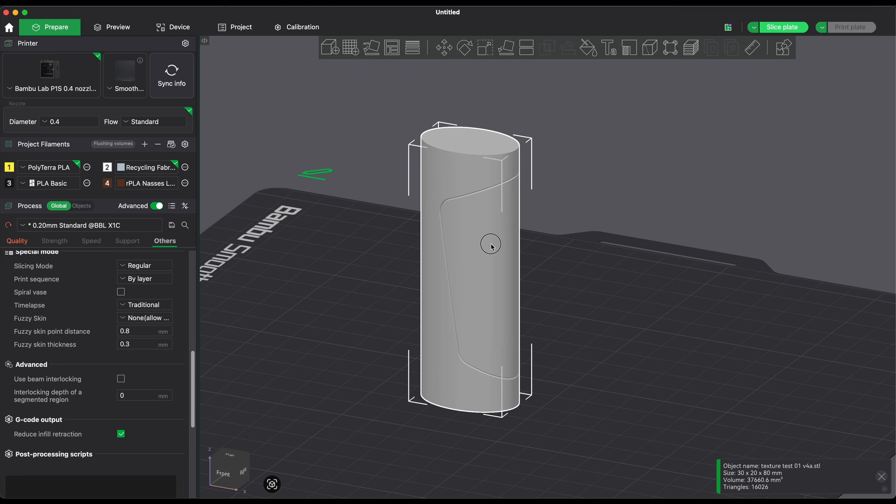So if you ever wanted to put a texture on a section of an STL file here, then you probably know you can use fuzzy skin, and especially fuzzy skin painting. Just select the part, select the tool, select fill, and you might need to wiggle around with the smart fill angle, but in this case it's fairly easy. And just select that. If you made a mistake, there's erase all painting, and you can change the settings and try again. And just hit slice.

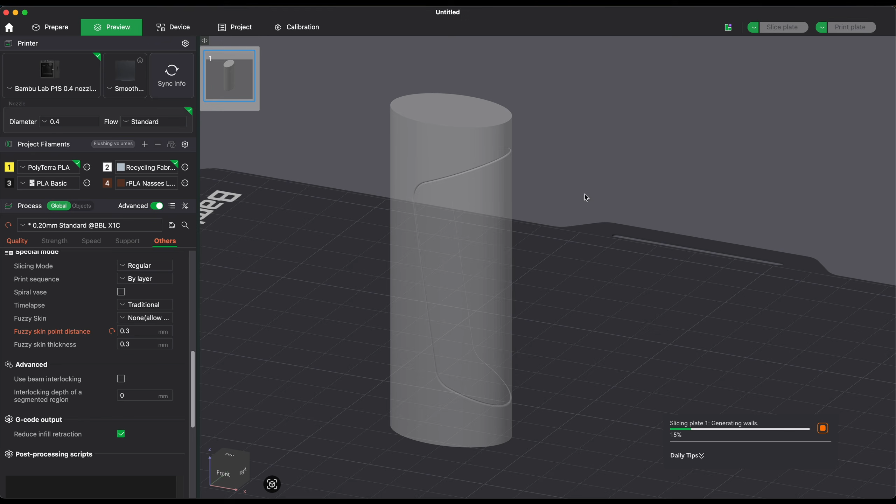And if that's too rough for you, you can change the settings here under the Others tab. Fuzzy skin point distance, maybe set that to 0.3 also. Slice again. And that looks much better.

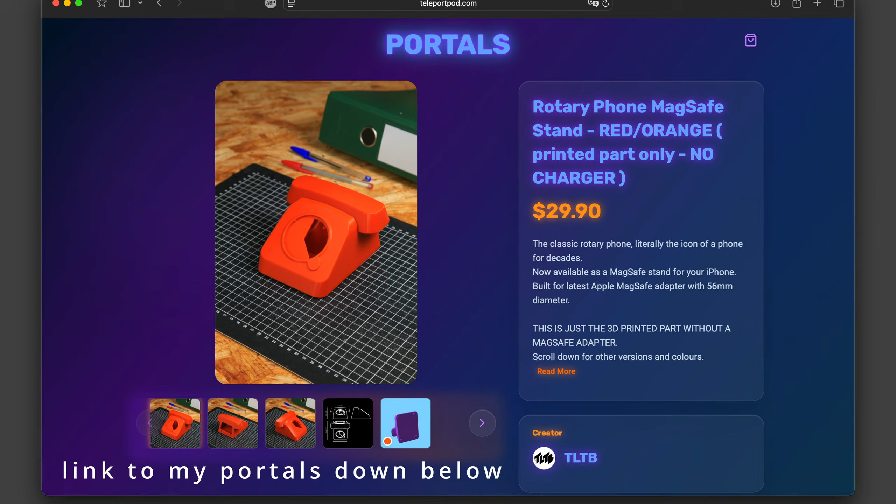But what if you wanted to actually bake this texture into the STL file to make sure it would get printed like this every time? If you want to share it, upload it to Cults3D, or actually maybe have it printed via portals. So let me show you a quick hack how to do that with Fusion and Blender.

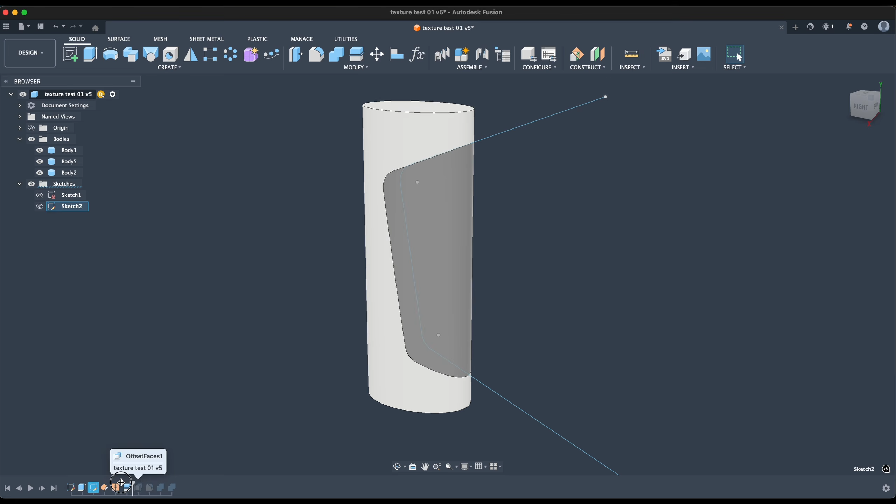So here's that test piece. Let me show you what I did here. It's fairly easy. I started with an ellipse that I extruded, and then I split this in two bodies with this line. And before I did this, actually, I took an offset surface of this part. So you just select all the surfaces, and this is like 0.5 millimeter inset, and you hit OK.

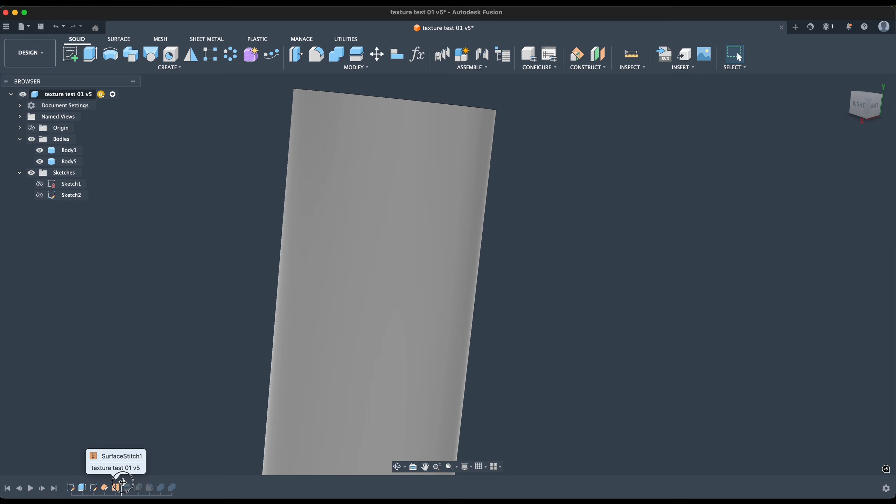To turn this into a body, you use the surface stitch feature, and you select that second body you can see in here in blue, and this will create a new body. And you can see here, there's the outer one and the inner one. We're only splitting the outer one, so we're left with this step.

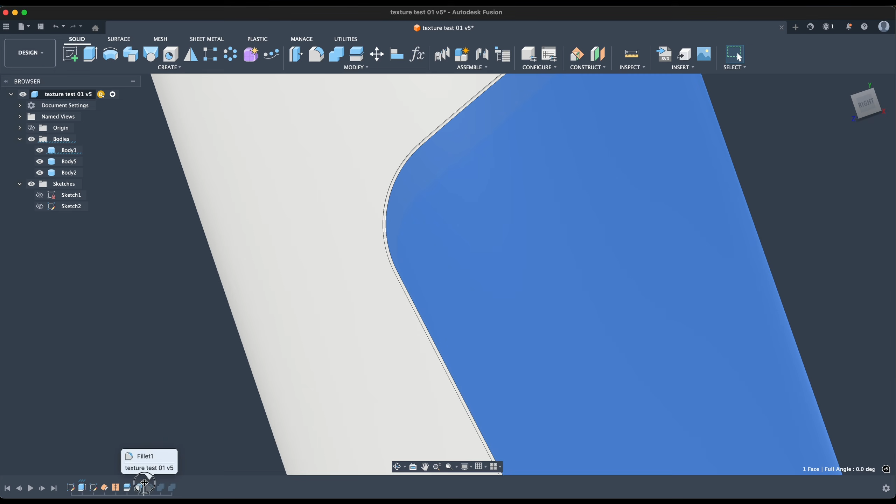I will also add a little gap here of, I think it's 0.15 exactly, because when we add the texture to this part, the texture will grow, of course, and to have a nicer separation between the two, that's why I put this gap here. You can play around with these values as you want. Kind of depends on your scenario also.

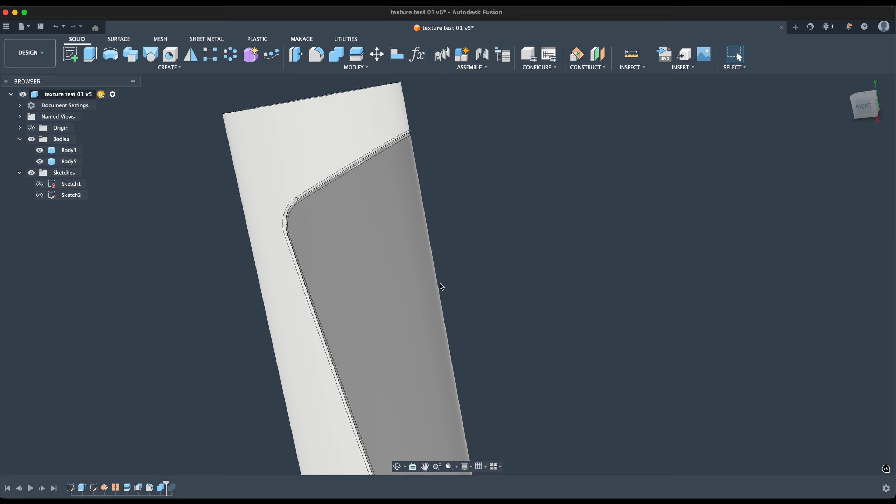And I put a little radius on here, and I merged the two bodies here into one, and we have the other body here, and that creates a nice overlap because we're going to merge them back together later. And if we don't have a fairly good overlap here, that's going to be tricky, and it's going to make the print take much longer, because then it'll print details on the inside that we don't even want.

So exporting this as an STL, I would recommend using the right-click menu here on a body, save as mesh, because then you also have the control settings. So we'll export that as the grip, and we'll right-click here, save as mesh. Refinement settings are set to high, that's good. And we'll call this main body. And that's basically it in Fusion. Let's jump into Blender.

So welcome to Blender. I'm using version 4.5.1 LTS. And the first step we're going to do here is hit A and delete all these standard components that we don't need. Then we'll drag in the main body and the grip at the same time. And we have to pay attention to the forward and up axis. In Fusion, X is forward and Y is up. And we'll import that. And ooh, it's kind of in your face, but that's not a problem.

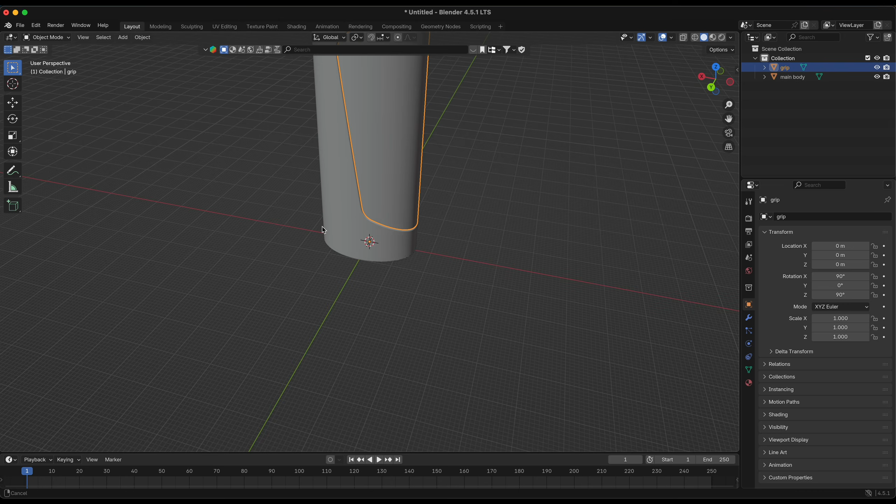Okay, here we go. We'll select the grip and apply a modifier, and that will be the remesh as the first step. I'd advise a 0.2 voxel size here, otherwise the file size gets really big. Of course, the lower this number, the higher the resolution, and also the bigger the file size.

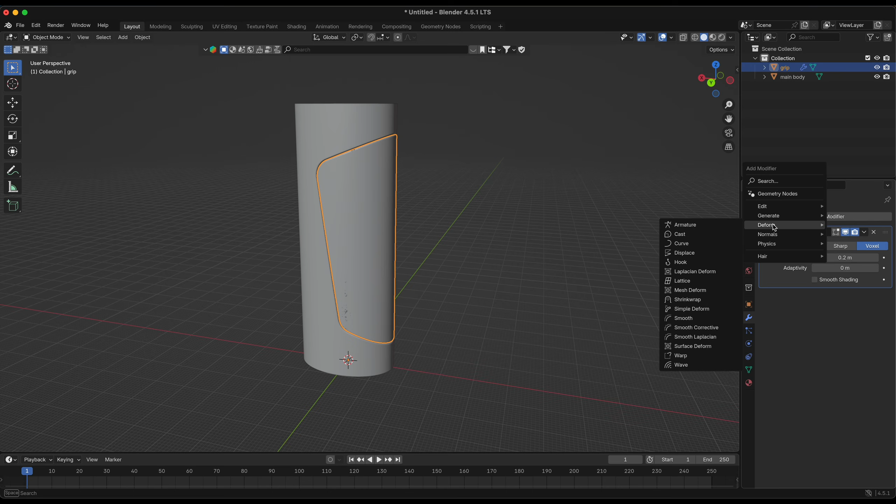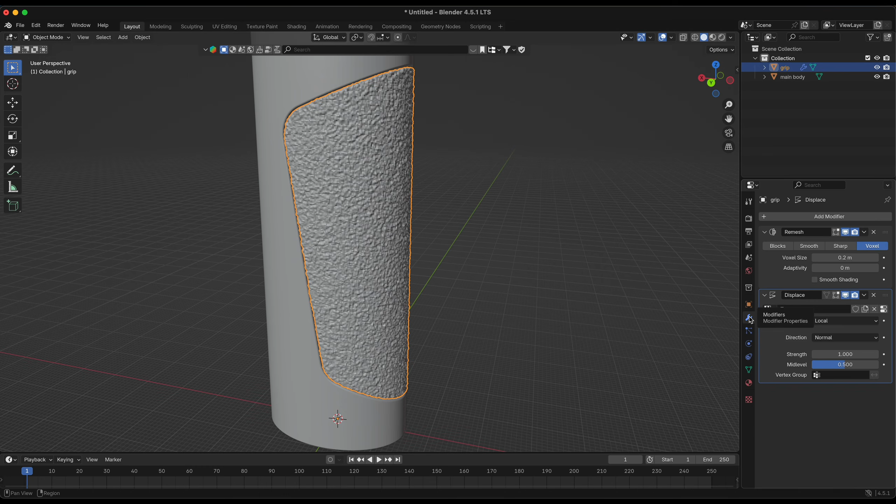So 0.2 will be enough. We'll add another modifier, under Deform and Displace. Just hit the plus under new texture and go to the texture properties. We'll select clouds in this dropdown, and I'd advise setting this to color, that'll make it a bit softer. You can play with the size here, I used 0.5, that worked well. Then go back to the displacement modifier and set the strength to 1.5. That might look a bit strong, but remember this thing is only the size of a lighter.

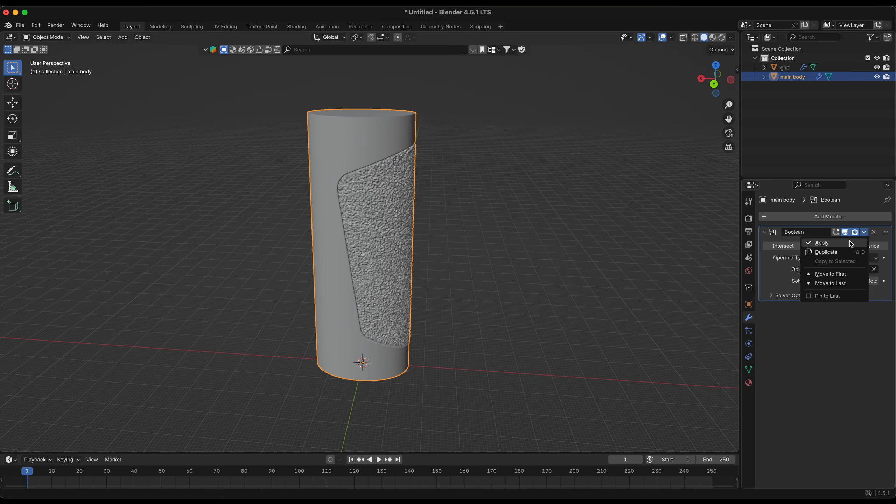One more thing we have to do is pick the main body and also add a modifier, under Generate and Boolean. Pick Union and take the eyedropper tool and select the grip, and it'll jump here in a second. The outline will show you that it worked. And now we can apply this modifier, so now this is all one mesh.

So we're almost ready to export to STL here. One more thing we need to do before that is either hide all the other components, or select what we want to export and go to File, Export STL, and check the selection only box, and then it'll only export what we selected. Also, if you're working with modifiers, it's good to know there's an Apply Modifiers box here for exporting.

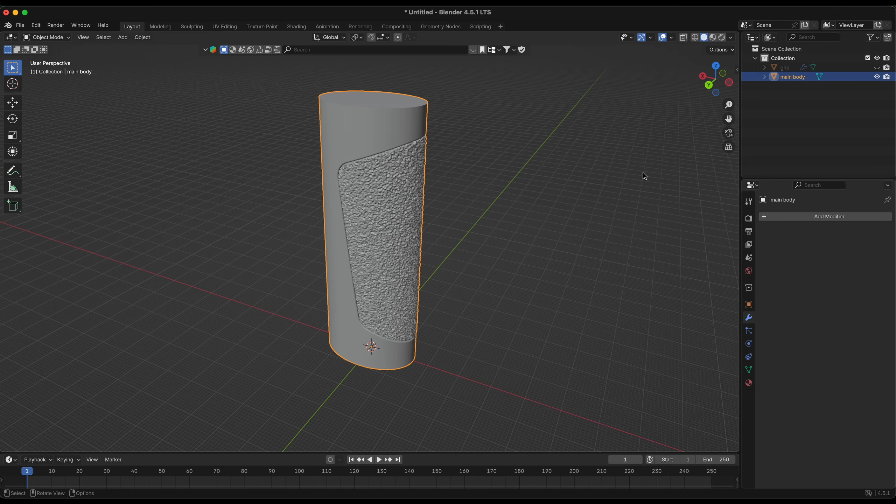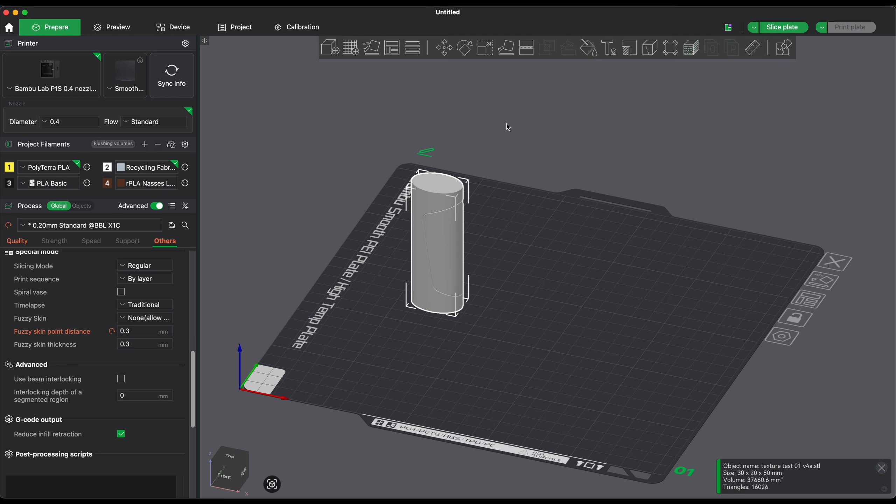Let's jump into the slicer. So I kept this fuzzy skin painted part in here for comparison, and let's load the texture test that we just created. You can see it imports nicely here, and all we need to do now is slice and compare the results. And you can see here, this looks fairly similar.

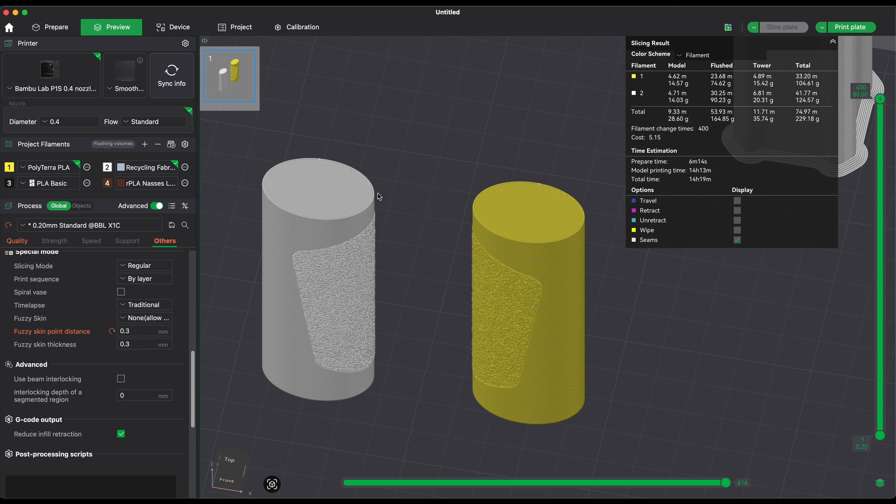And well, that's all we wanted. Don't get shocked by this printing time, that's of course because there's two different colors selected here. If we select the same filament and slice again, print time is not going to be longer. Yeah, see, this prints in 1 hour for these two.

That's not terrible. And yeah, that's how you bake your texture into your STL with Fusion and Blender.